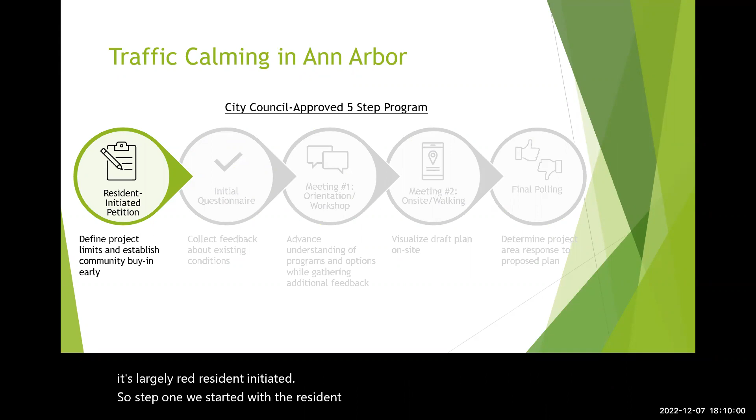So step 1, we started with the resident initiated petition. Any data used to reference this project will be from the petition received October 2019. I know some of you may be familiar with a petition that was submitted prior to 2017, but that petition did not qualify due to the structure of the traffic calming program at that time. That older petition data was not used for this project. So any reference to a petition moving forward is in reference to the one from October 2019.

So again, the numbers you see here are from the resident-initiated petition received October 2019. This summary shows that the program requirements for both area representation and minimum points were met.

Step 2 is the initial questionnaire. This is where you probably first saw the Wade Trim name and logo pop up with the City of Ann Arbor. This step is where we collected feedback about existing conditions through that initial questionnaire, which was mailed out to project area residents in October.

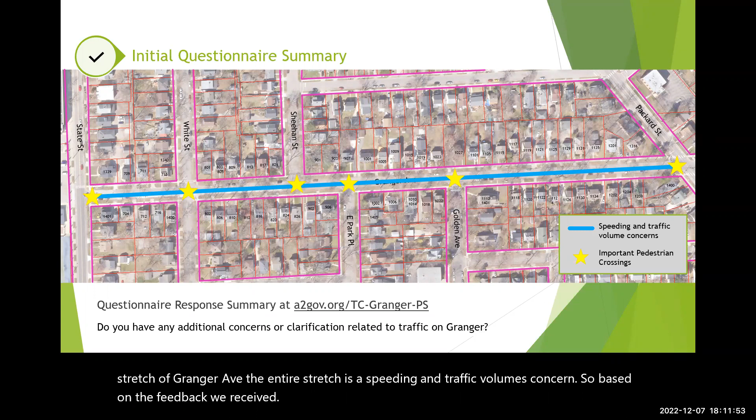Of those who completed and submitted the questionnaire, 88% were in support of continuing with the traffic calming program. This image shows that based on the questionnaire feedback, the entire stretch of Granger Avenue is a speeding and traffic volumes concern. It's not just Golden and Packard, or Park and Golden, it's the whole stretch. The stars mark where important pedestrian crossings are within the neighborhood.

The questionnaire response summary is available on the project website. If anyone has additional concerns or clarification related to existing conditions on Granger, we can take a moment if you want to raise your hand or use the Q&A.

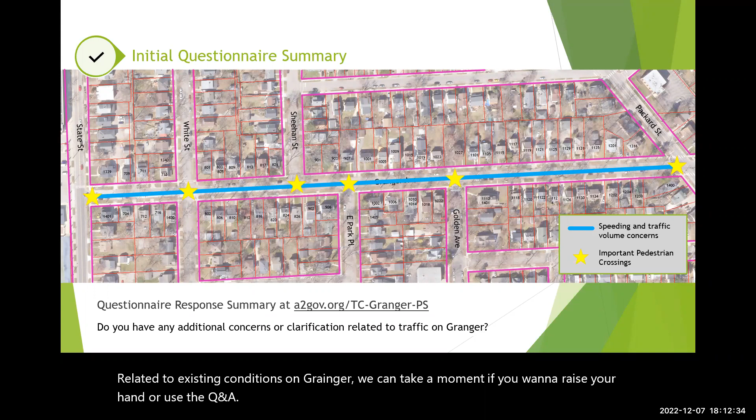There are no questions, Christy. Okay, thank you, Lori. So we'll move on then.

So that brings us to today. That's where we are this evening, Step 3, meeting number 1. This is where we'll advance our understanding of the options that we have and gather additional feedback based on the starter idea we will present.

Next, we'll launch another poll before we start discussing the device toolbox. This poll question reads: have you reviewed the traffic calming guidebook, specifically the device toolbox found on pages 9 through 12? Options are yes, I'm all set, yes but I would still appreciate a refresher, or no.

Looks like we have 7 out of 8 who have answered the poll. I'll give it just a few moments still before we close it. All right, we'll just close it.

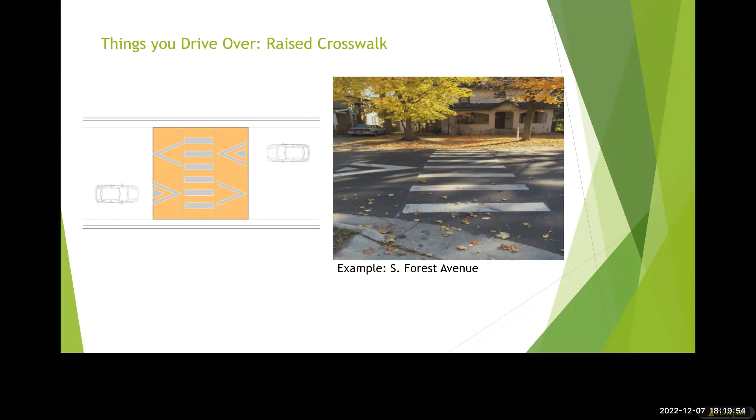Are there any questions regarding the devices that you drive over?

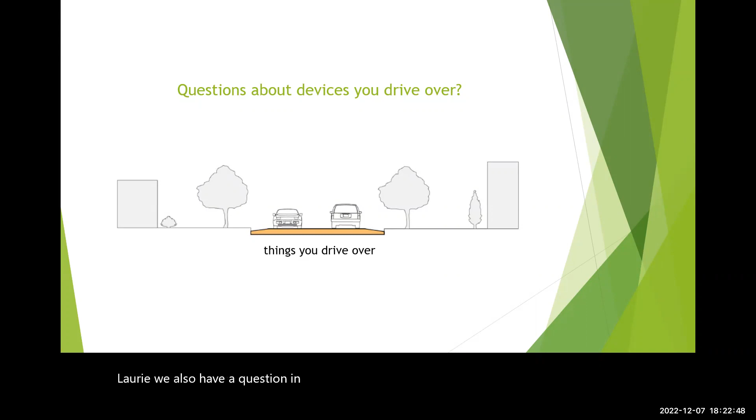Lori, we also have a question in the chat from Cherry: is the only real difference between the hump and the table that the table is flat in the middle?

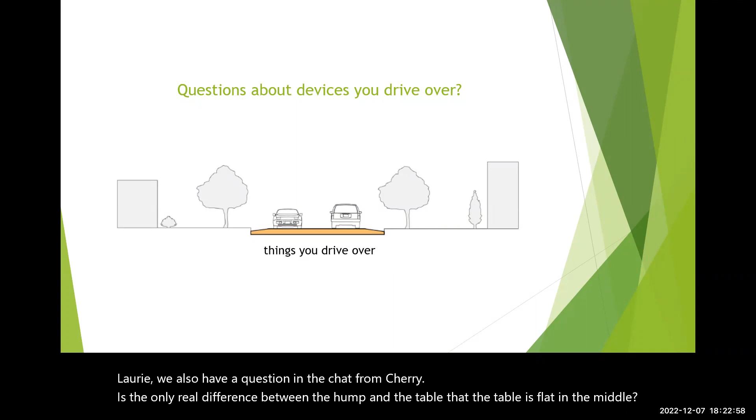So there are a few differences. There is the center flat platform in the speed table with the tapered sides. Usually the speed table is a little bit wider across from edge of roadway to edge of roadway, so typically they're around 22 feet wide. And then the speed hump was the other option. Those are a little bit narrower, typically around 12 feet wide. They're also parabolic in shape, and then they extend the full width of the street except for the gutter. So as far as design and the physical aspect, the biggest difference is that flattened center. There are some other minor differences, but the main difference between the two is that flat area in the middle.

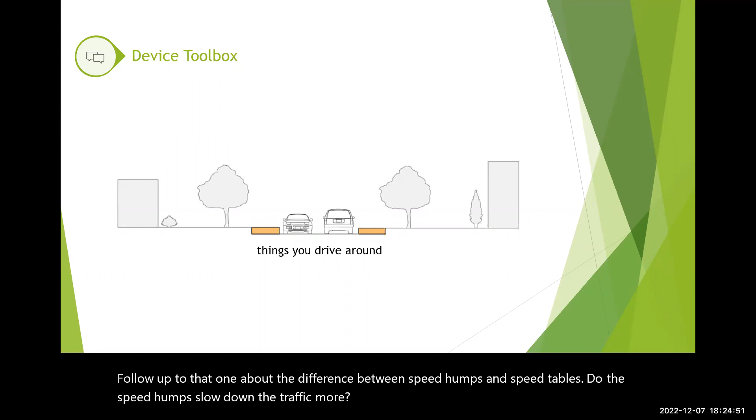So the speed hump was an average of 20 to 25% reduction in vehicle speeds. And then the speed table, let me see.

We did not have that listed. I will find out the reduction in speeds for those, and we can get back to you. I'll come back to this question. I'll look it up.

Hey, Lori. If you don't mind, I'll add a little more context to that. Can everyone hear me okay? This is Cyrus Naheedy from the city, and I'll just offer that the percentage, those statistics we offer

about speed reduction or traffic reduction, crash reduction, those are from larger studies done by the Institute of Transportation Engineers. So rather than focusing on a particular statistic and how much it slows down traffic, one device versus another, our experience at the city has been that while there are important differences between the devices and how much they can have an individual impact on vehicle behavior, generally a project is best viewed as how overall, like all devices on a project area, like in this case Granger, how all the devices together slow down traffic is probably more indicative of how it's performing.

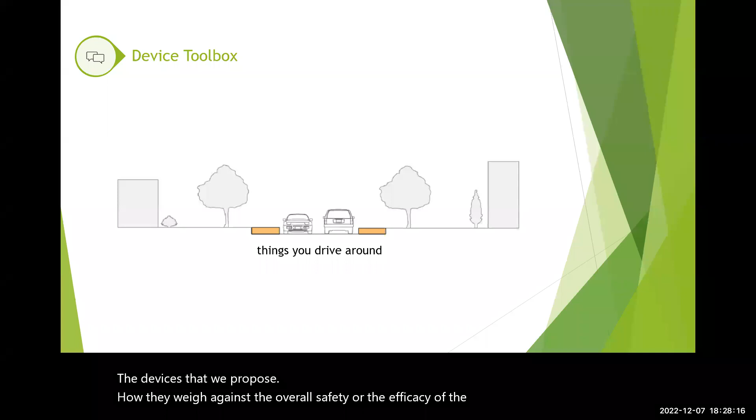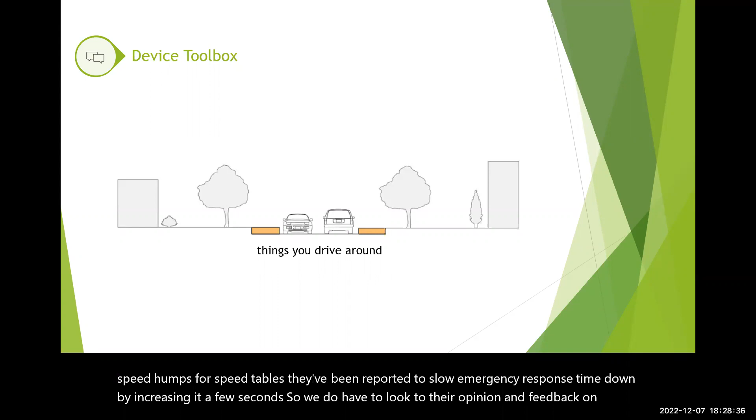So speed humps or speed tables have been reported to slow emergency response time down by a few seconds. So we do have to look to their opinion and feedback on whether that would weigh against the benefit of a speed hump or any of the devices, really.

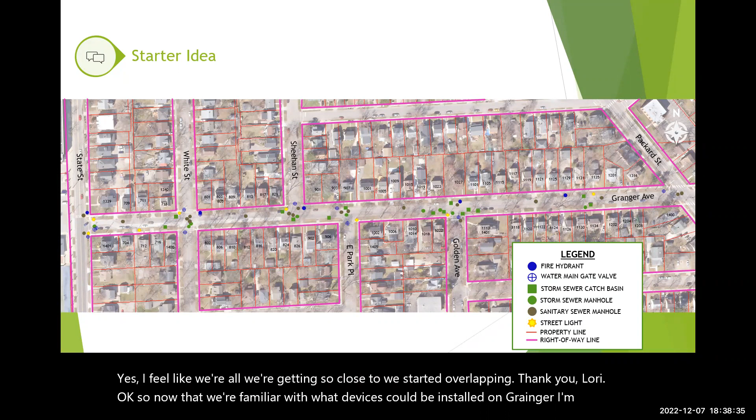Okay, so now that we're familiar with what devices could be installed on Granger, I'm going to present the starter idea. This image is showing the project area with existing utilities, property lines, and Ann Arbor right-of-way. This is what's there now. And these are the starter idea devices. We are proposing 4 traffic calming devices along Granger Avenue. So let us zoom in on each one for a better view.

Device number 1, we're proposing a residential traffic circle at the White Street intersection. This is one of the devices you drive around. Going back to the slide from our toolbox, it doesn't change the existing traffic control or flow of traffic. This is not a roundabout. You don't have to go all the way around just to make a left turn.

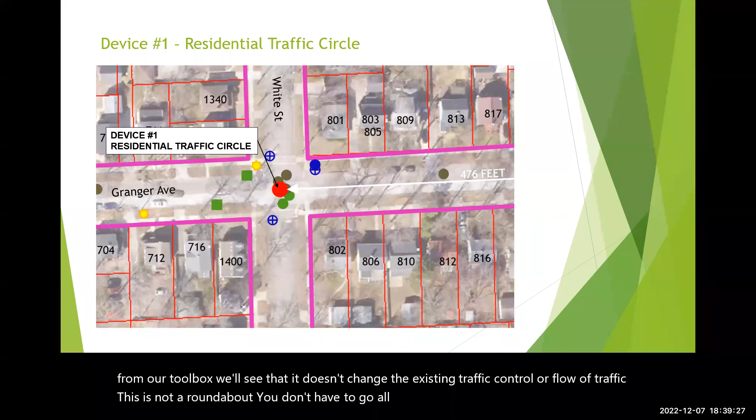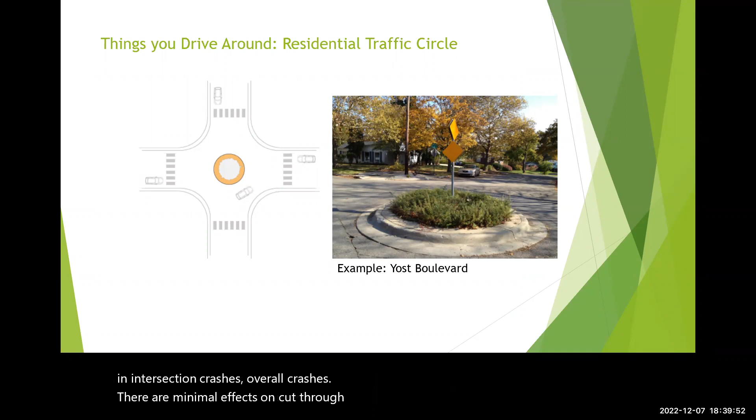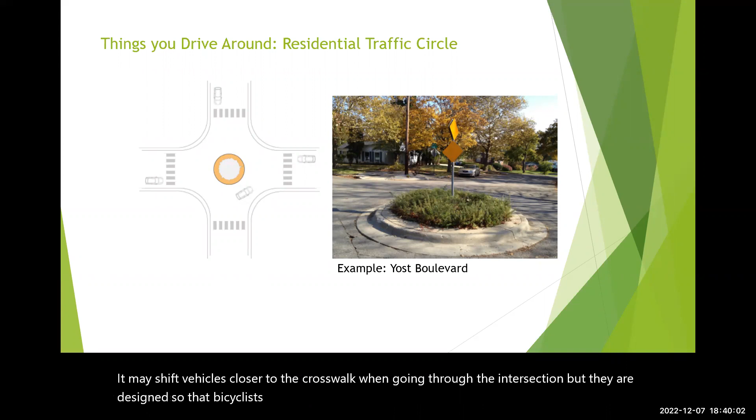Here's the slide from the toolbox. Remember that the residential traffic circle has reduction in mid-block speed, reduction in intersection crashes, and overall crashes. There are minimal effects on cut-through traffic. Left turns might be difficult for larger vehicles. It may shift vehicles closer to the crosswalk when going through the intersection, but they are designed so that bicyclists can navigate with traffic around the circle.

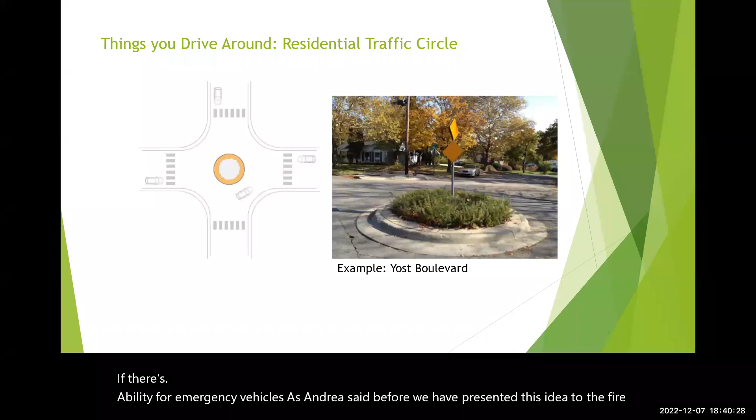As far as any questions of if there's enough room, if there's ability for emergency vehicles, as Andrea said before, we have presented this idea to the fire department. They've given us response that they do feel comfortable. So if this is something that you as residents feel would be useful to you or would be livable with, we would move further ahead with the design portion in terms of how big, how flat, all of that.

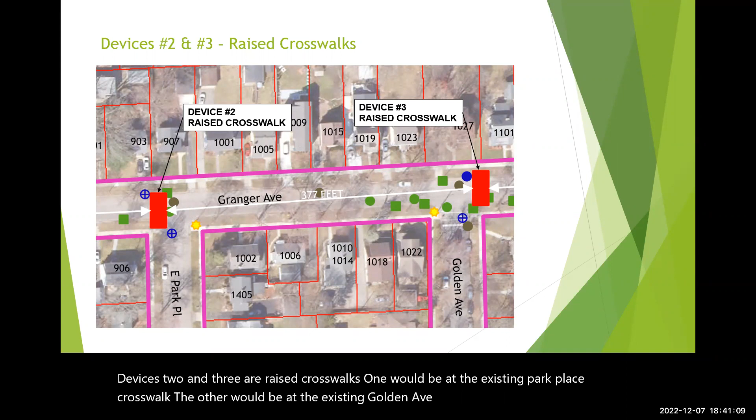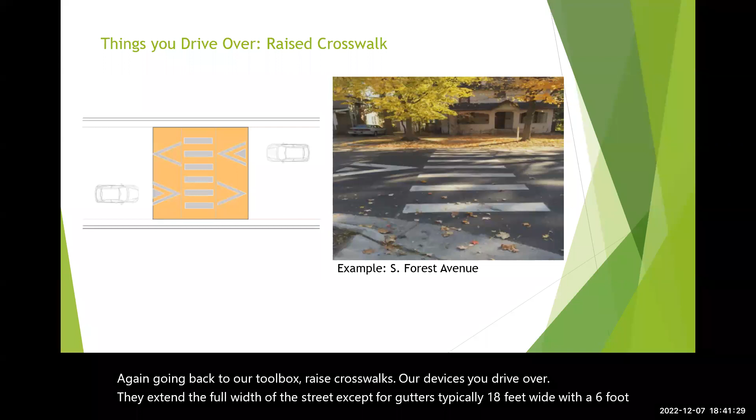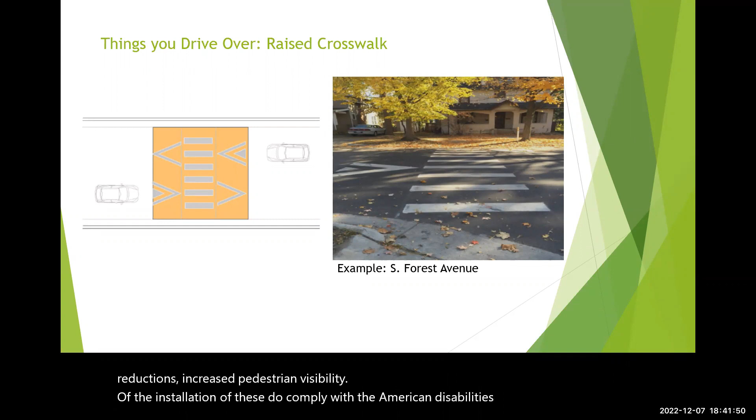Devices 2 and 3 are raised crosswalks. One would be at the existing Park Place crosswalk. The other would be at the existing Golden Avenue crosswalk. Going back to our toolbox, raised crosswalks are devices you drive over. They extend the full width of the street except for gutters, typically 18 feet wide, with a 6-foot wide center platform, and crosswalk striping. Usually what we see with raised crosswalks are speed reductions, volume reductions, crash reductions, increased pedestrian visibility. The installation of these do comply with the American Disabilities Act. So that is what we're proposing at these 2 crossings here.

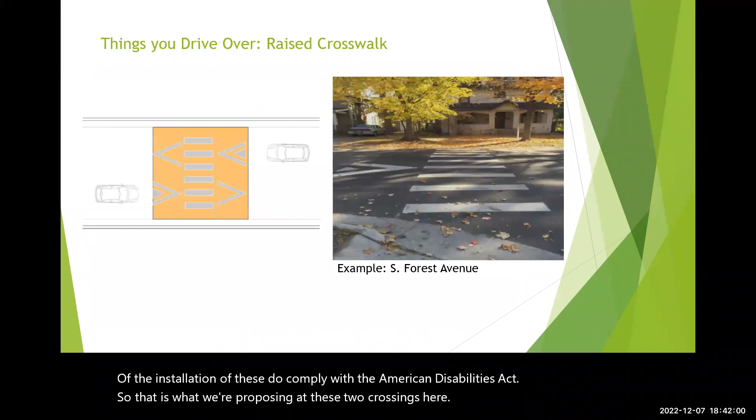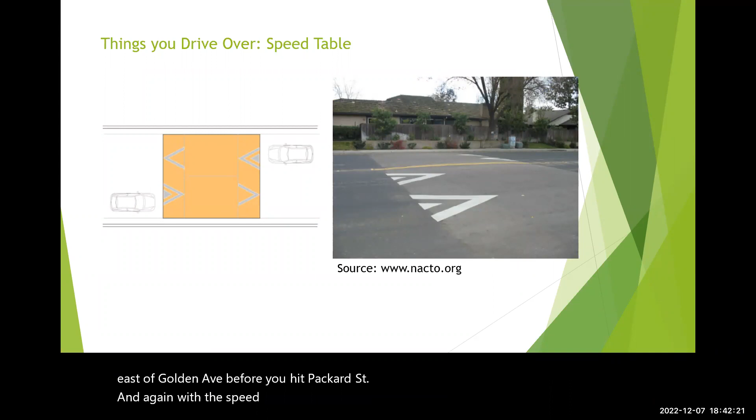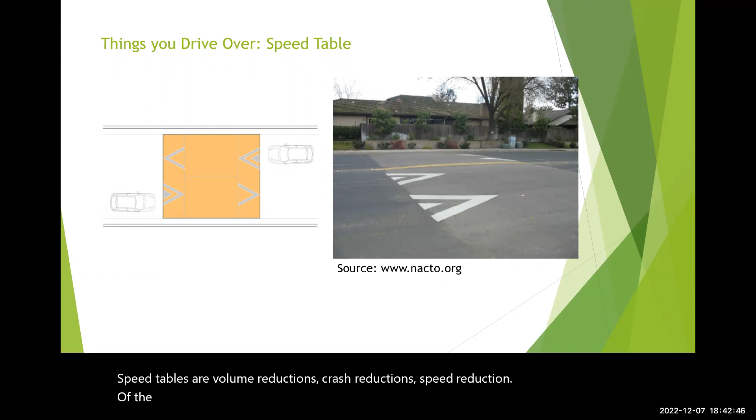Device number 4, we're proposing a speed table. This would be located roughly 375 feet east of Golden Avenue before you hit Packard Street. The speed table is typically 22 feet wide, going full width of the street except for the gutter, with a 10-foot wide center platform. What you usually see with speed tables are volume reductions, crash reductions, speed reduction. The height is designed for bicycle safety. There are no issues with permission to park vehicles on speed tables or placing trash cans on speed tables.

And so now we'll discuss. This was a lot of information we just covered, but I'll put the starter idea as a whole back on the screen. We'll spend the next chunk of time devoted to feedback and to giving everyone opportunities to speak. And I know I do have raised hands.

Christy, can I address one quick question about, has U of M been brought into this discussion? I saw it in the chat. U of M is not typically brought in to discuss. The AAATA is. We actually have someone here right now from the AAATA to review our plans and tell us if they have any issues. But we do take into consideration when drafting these plans, turn radiuses, the width of the streets, many factors that would impact any large vehicles or buses. So that has to do with fire rigs, buses, garbage trucks, public works vehicles, anything like that. So I just wanted to let you all know, because I saw a question about that, that U of M was not directly brought into this discussion. They aren't typically, but we are happy to give them the preliminary plan, which would be the one after this. They'll cover that more later, if that is something that needs to be done.

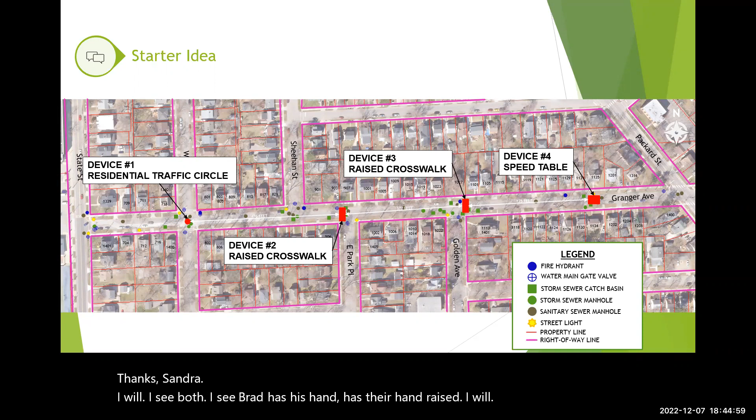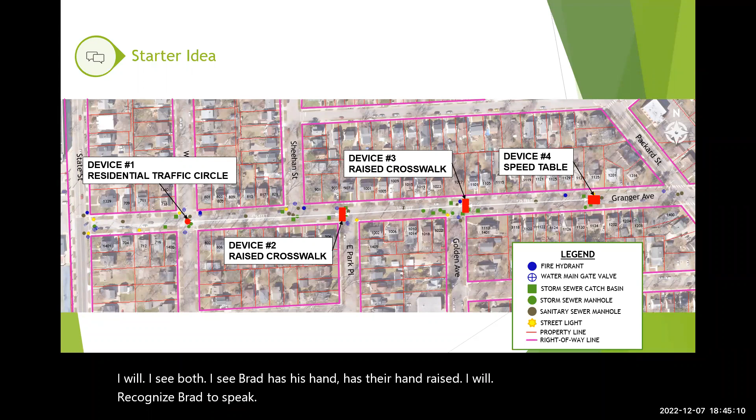Yes, good evening, Brad Batty. And I think we could effect the traffic circle proposal immediately. All it would take is a few trash cans. In fact, I've contemplated doing that on occasion.

Thank you, Brad. If this is something that does have support, we can move forward with additional designing of this device.

I think I'm more enthusiastic about speed humps or whatever, but I'd be willing to try the novel approach of the small circle if it helps.

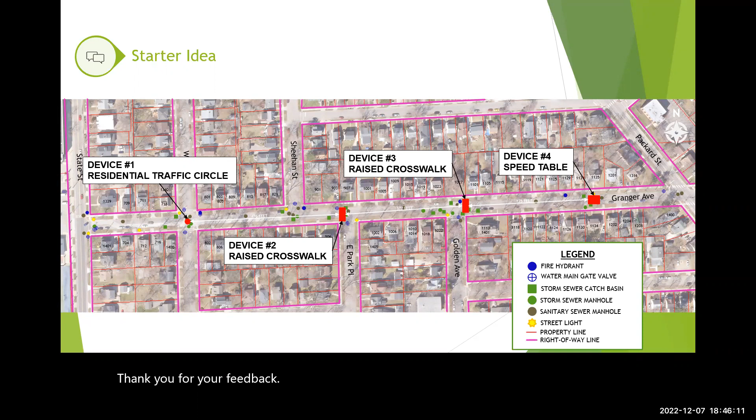Although I have seen 802 Granger have their porch demolished by a car missing the intersection somehow. Don't know how they did it, but they made a mess.

We do have a few questions in the chat box before we take other speakers. There was a question of how the location of the table was determined.

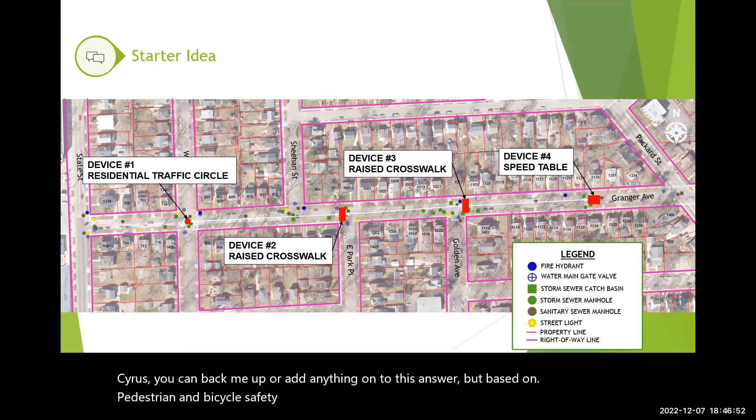Cyrus, you can back me up or add anything onto this answer, but based on pedestrian and bicycle safety resources, these traffic calming devices are usually only as effective as how they're implemented. So if you put devices too close together or too far apart, it's not really as effective as it could be.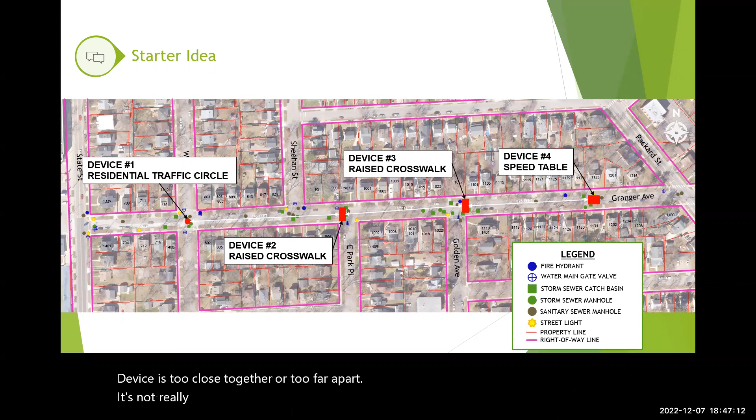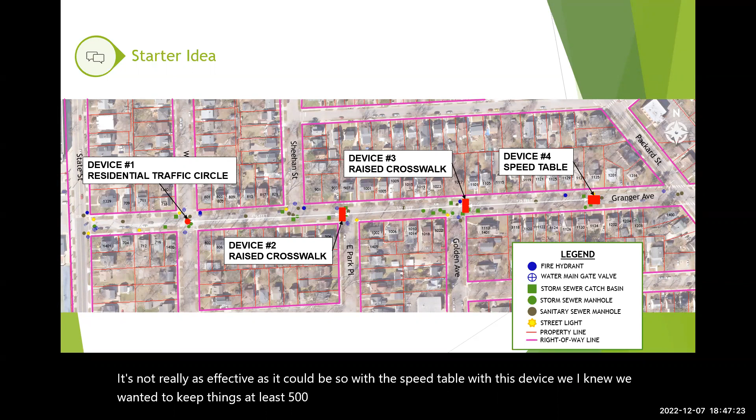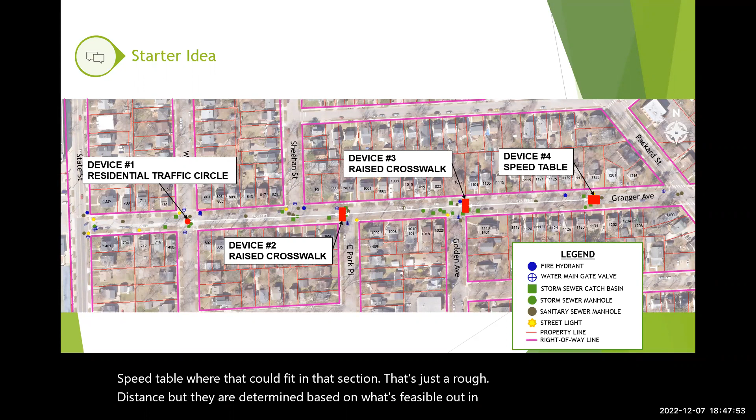So with this speed table device, I knew we wanted to keep things at least 500 feet apart, less than 500 feet apart, in order to maintain traffic calming throughout the entire section of Granger. So going down the neighborhood and taking a look at the typical dimensions of a speed table to see where that could fit in that section. That's just a rough distance, but they are determined based on what's feasible out in the field, in the project area, and based on those safety resources.

Yep, nothing major to add, just that the device's proximity to each other, or in device one's case, how close is it to the end of the corridor to State and Granger? Device 4, how close is it to Packard and Granger? Trying to keep them relatively close together, but not too close, I think is a big element of this starter idea. There's a number of crosswalks, so we, in theory, had those to use as starting points.

You can see there are 2 raised crosswalks here, but instead of just making every crosswalk or most crosswalks raised crosswalks and calling it a day, we wanted to introduce everyone to the idea of different devices. So a speed table in this case, because there's not a crosswalk there, and I don't think there's a significant need for a mid-block crossing there. We could always consider that based on everyone's feedback here, but if there's not a need to actually cross Granger between Packard and Golden, then a speed table would suffice.

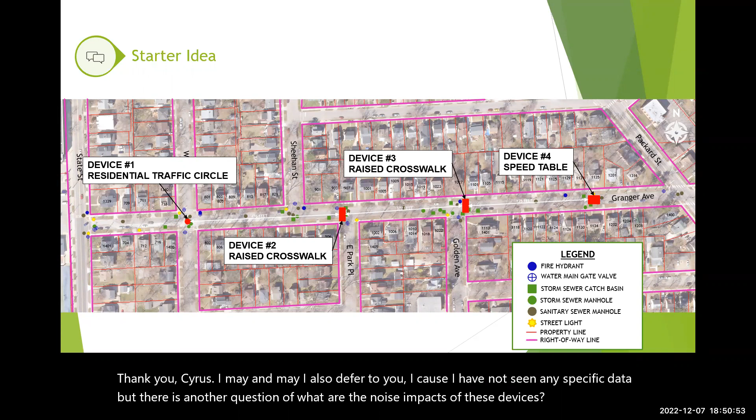That's a good question. I don't know that we have quantitative measured data on that. Andrea, you might be able to speak better to this than I can, because you've probably spoken with more traffic calming residents than I have. I can't recall this being a significant issue that we've heard back about.

No, you are correct, we have not heard any complaints. We have also tried to find research out there about increased noise from these devices installed anywhere we can find it, from FHWA, and Boulder, Colorado is another place we like to look for data because they implement a lot. But we have not been able to find anything out there saying that device installations increase noise.

We also do a 1-year follow-up survey asking residents for feedback about the devices installed, and we have never once at this point—and I've been with the program for about 8 years now—heard any noise issues at this time. So I can't point you to data that says one way or the other, but we have not heard anything at this time. That might not be a great answer, but that's the answer I have, and I'm sorry.

Yeah, I've worked on other projects outside of Ann Arbor, installation of speed humps, speed bumps, speed tables, and I haven't heard any complaints of noise either. They do help to slow down the traffic, and the noise is just not a huge issue. In the neighborhoods, they're typically much happier having the traffic be slowed down, and not really noticing the noise associated with any bumps.

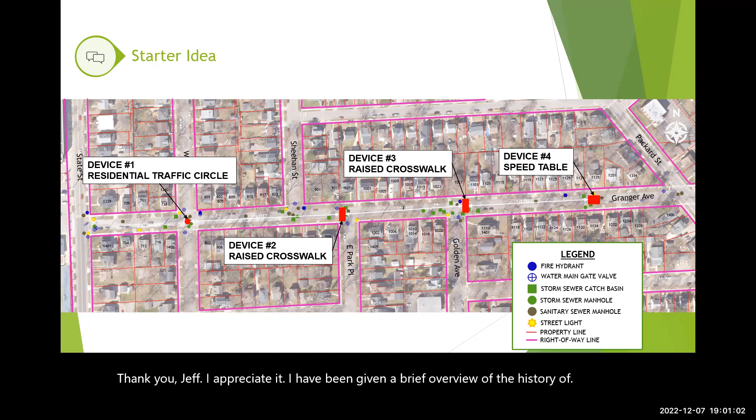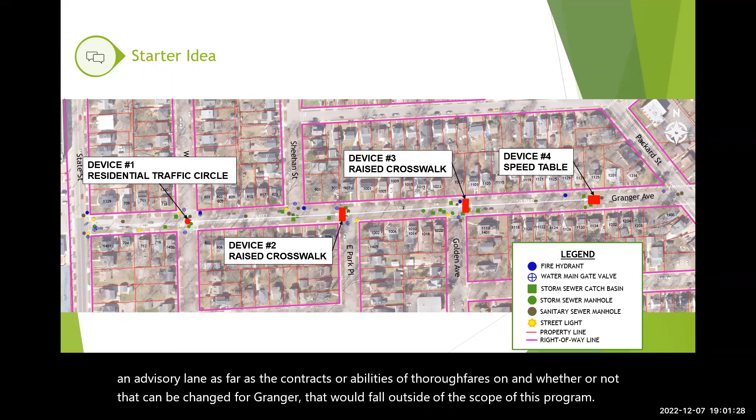Thank you, Jeff, I appreciate it. I have been given a brief overview of the history of changes that Granger has experienced, with that original petition and the conversion to an advisory lane. As far as the contracts or abilities of thoroughfares and whether or not that can be changed for Granger, that would fall outside the scope of this program. Unless Andrea wanted to add anything, I'm not aware of any procedure we could take action on within this program.

Christy, you are correct. Jeff, if I understand what you're saying, you're referring to Act 51 funds. Per Act 51, this street is deemed, if I remember correctly, a major, which meant the traffic calming program previously used Act 51 to determine when streets fell into the local traffic calming program based off of their classification. Granger was one we did realize, a little bit of history, so everyone else here knows what we're talking about.

Granger was one of the streets that led us down the road of thinking about other maps to utilize, like the National Functional Classification, the NFC. It's SEMCOG's map, which classifies Granger as a local. So we used that with our updated program in 2019 to allow other projects or streets into the program that wanted in for a while, but were classified off the Act 51 map as a major, and this is a local streets program.

I don't want to speak on behalf of the city in the sense that we would never ever remove anything from Act 51, but we receive more money when it's classified a different way. So I'm not saying this is off the table for discussion, I'm just saying, Christy, you're correct, it's outside the scope of this program. Jeff, if you want to send an email to trafficcalming@a2gov.org to discuss this further, we could have the transportation manager and whoever else part of that discussion if needed, and provide a better answer than what I just gave. Feel free to reach out to traffic calming and we can provide a better answer.

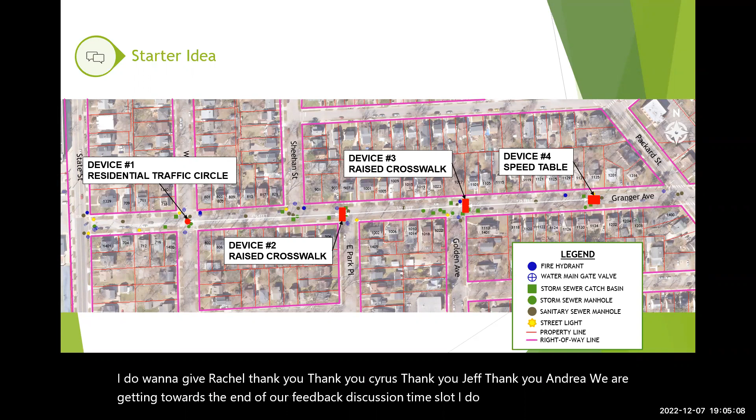I do want to give Rachel, thank you, Cyrus, thank you, Jeff, thank you, Andrea. We are getting towards the end of our feedback discussion time slot. I do want to give Rachel the opportunity to speak, and then I have a question from Tom that I'd like to answer afterwards. So I will go ahead and let Rachel, if you'd like to unmute yourself.

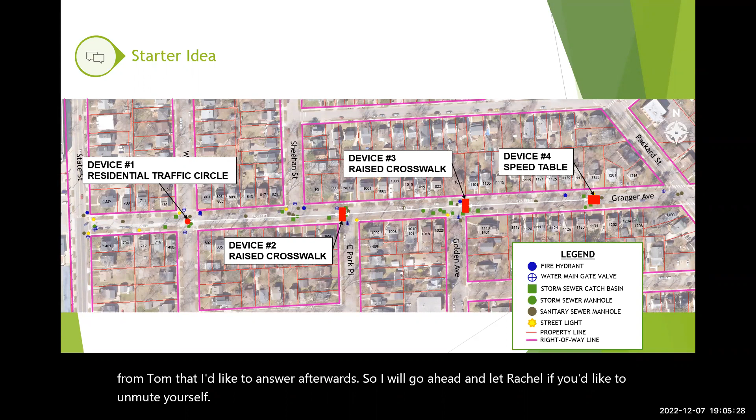Rachel posted in the chat asking if these traffic calming measures are likely to impact the current lines. As a cyclist, I'm a big fan of the current paint and lines on Granger. I think that has done a significant part to slow traffic, and I'd like to see them stay that way, even if there are additional traffic calming measures, which I really hope there will be. I'm just trying to figure out how the two affect each other, or if they do.

Oh yes, I did answer that. I don't know if it was published, but I did add a typed answer to that question.

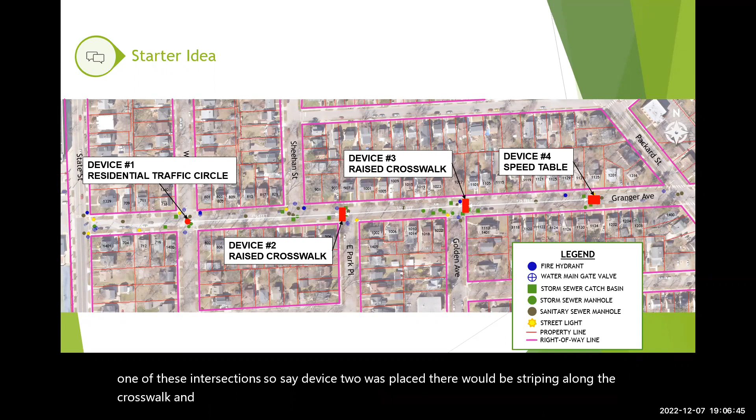We do not disturb any existing pavement markings. We don't take them away, and we don't add more if they're not related to a device. So if there was, say, a raised crosswalk placed at one of these intersections, if device 2 was placed, there would be striping along the crosswalk. And then, if I'm correct, those bike lane lines would be restriped as well.

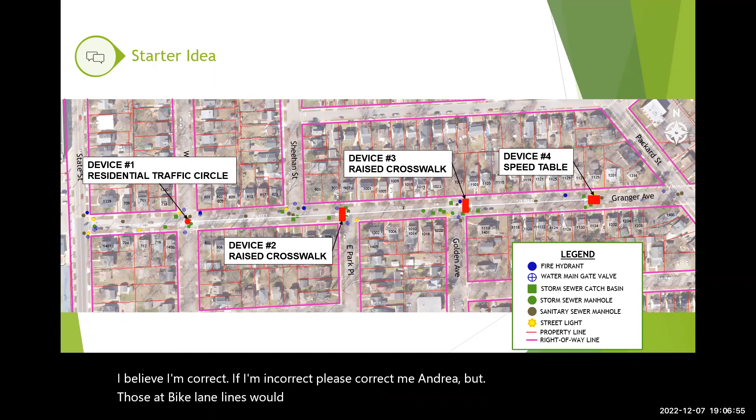So you are correct, Christy. This is a retrofit program, so the existing road should stay — and I say should because sometimes we do have to make accommodations. This is a starter idea, a preliminary plan. We've done way more vetting, just gonna say that. But we don't take things away unless that's very clearly stated.

So the existing road, it's a retrofit program. We don't change curb lines, anything like that, with the exception of sometimes bump outs, but you guys already have bump outs, which is why they're not proposed here. They have as many bump outs as we can give you. So yes, everything should stay the way it is. These are just additional devices, and unless pavement markings conflict with what's out there, we don't like to take things away.

And Cyrus, if I remember correctly, our new Ann Arbor Moving Together plan identifies this street as one of the ones that — correct me if I'm wrong — there's something there too, where we wouldn't want to take anything away that's existing. You're right. As Christy and Andrea said, we wouldn't modify anything.

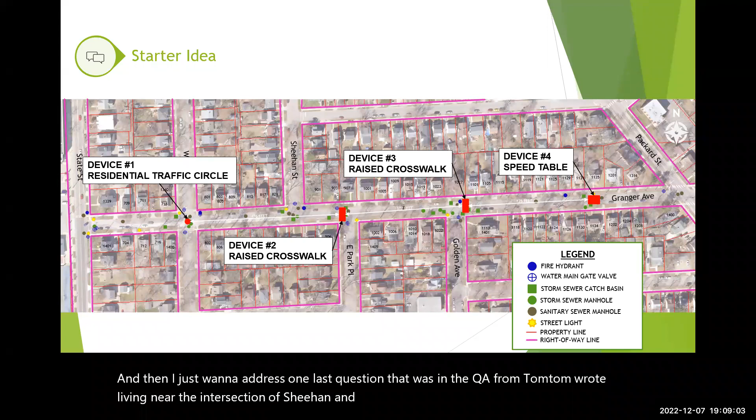I just want to address one last question that was in the Q&A from Tom. Tom wrote: living near the intersection of Sheehan and Granger, we regularly observe several near misses involving vehicles pulling out onto Granger. This appears to have started only since the parking spots were placed at this intersection. Is there anything that could be done to make this intersection safer?

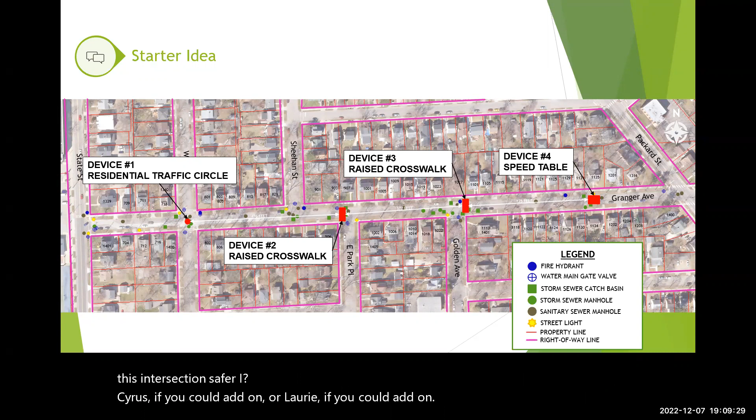Cyrus, if you could add on, or Lori, if you could add on — I know that the proposed traffic calming device, device number 2 at Park Place, would, because of Sheehan's closeness, have an effect on Sheehan as well. But Lori, if there's a more direct solution, if that's what you were thinking.

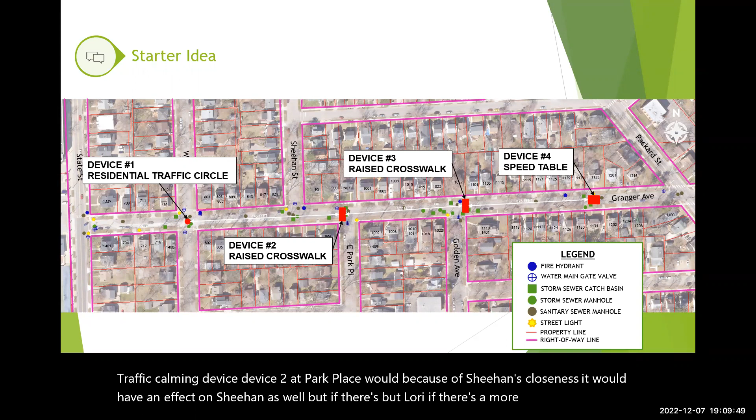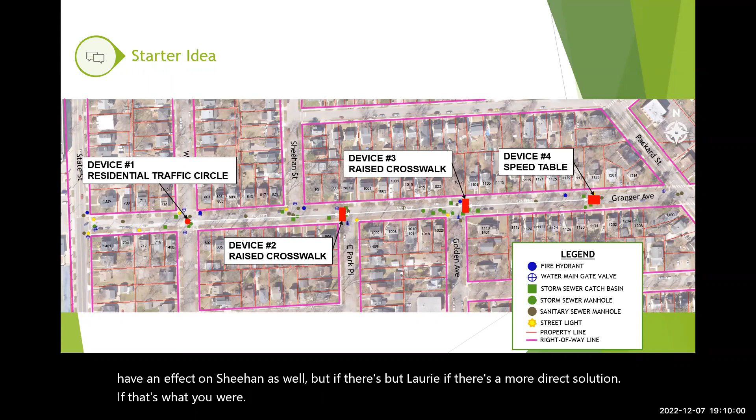I thought I saw on the chat a little note that said Andrea would like to answer the question, but then that disappeared, so I wasn't sure if Andrea had a comment as well. No, I was marking it as answered live. You're good, keep walking, okay, or keep going.

So the issue being discussed in this question is related to parked vehicles, whether legally or illegally parked, on the side of the street — that's a sight distance issue and not really able to be addressed as part of the traffic calming program. So it wouldn't be the type of issue we could accommodate in this study, but it could be looked at as part of another effort. I think Andrea mentioned you could email a2gov and discuss it as part of another potential study they could look into as well.

Yes, thank you, Lori. Cyrus, were you going to add anything? No, I realized I was just going to offer a restated version of what Lori said, so I decided to stop.

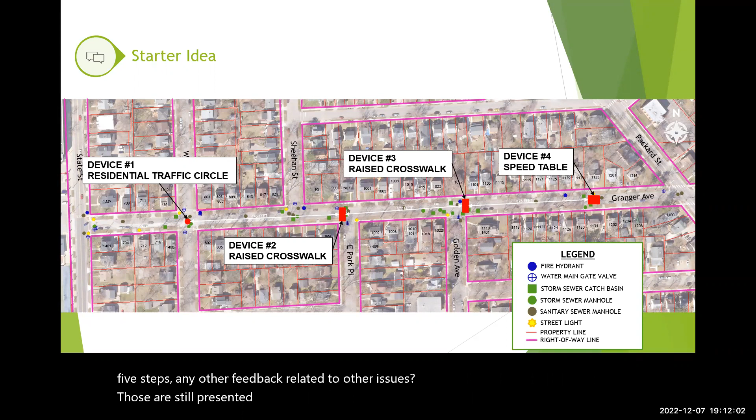Tom, I don't want you or anyone else to think that if this program cannot address your specific concerns, they're just thrown out. We gather all of this feedback, and once this program is completed through the 5 steps, any other feedback related to other issues is still presented to the city engineering department to use in future work.

Thanks, Christy. I was going to add that if there's a determination of a change to be made that's not within the traffic calming program, we can make it independently. If this project isn't supported in the end and no traffic calming is installed, but we determine there's a need to change something else based on feedback we've heard through this project, we would still make those changes.

Please share that feedback and we'll take a look at it independently. If there's a need to change anything, we'll either change it independently of the traffic calming program, or we may try to coordinate the timing of a change so it's done with the traffic calming program, but those are independent of whatever actually happens with this project through the program.

I was going to suggest that Cherry has some comments about the Granger and White intersection and device number 1, the starter idea of the traffic circle. We have polls further ahead where you can vote on those types of options and ideas, so maybe we can move forward into that section. That would help us understand if that option is desired or not, or if another option is preferred.

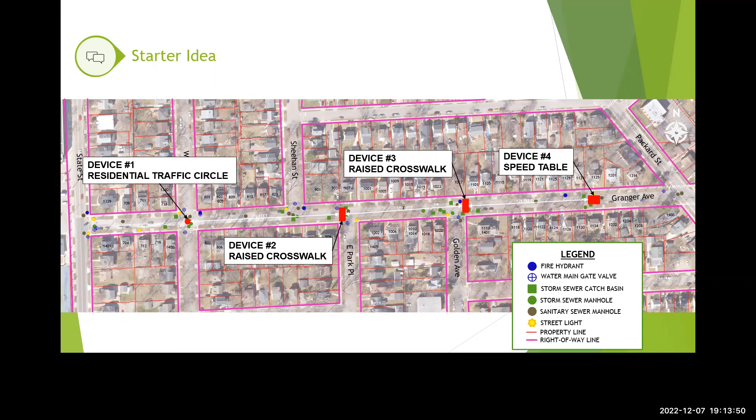Yes, thank you, Chris. I think we've had good discussion on this starter idea. We're going to move on to polling. Again, I'll pull up each of these devices and we'll launch a poll on whether or not you support them.

So for device number 1, we'll launch a poll here. The question reads: do you support device number 1, residential traffic circle at White Street? There are 4 options to vote on: yes, I support this device and live in the project area; yes, I support this device but do not live in the project area; no, I do not support this device and live in the project area; or no, I do not support this device and do not live in the project area.

The last time I checked, everyone said they did live in the project area, so I shouldn't see otherwise.

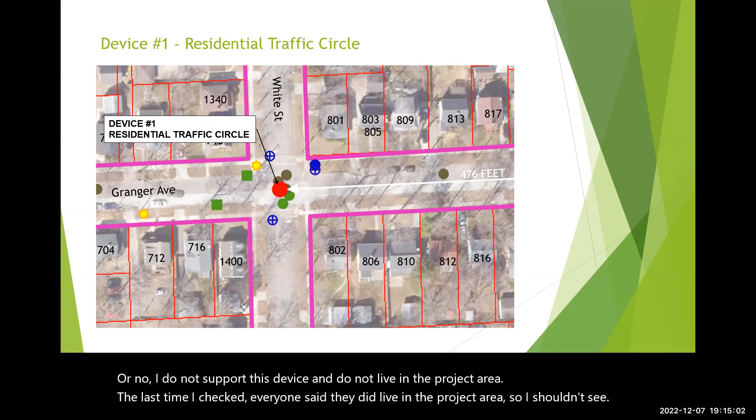Also, Christy, because we heard some feedback about possibly wanting a raised intersection here, I took the initiative and added a part 2 to this device, so you can like both the raised circle or residential traffic circle and the raised intersection. We want to see your preference so we can go back, reevaluate, and make sure the preliminary plan addresses all your concerns. So there's a second question: do you also support a raised intersection at White Street? It's one or the other, but you can still like both.

The options are: yes, I support this device and live in the petition project area; yes, I support this device and do not live in the petition project area; no, I do not support this device and live in the petition project area; no, I do not support this device and do not live in the petition project area.

Christy, I apologize for jumping in, but I thought I'd add that for you. No, I appreciate it, thank you. I was about to finish that up - I was like, wait, there's another question.

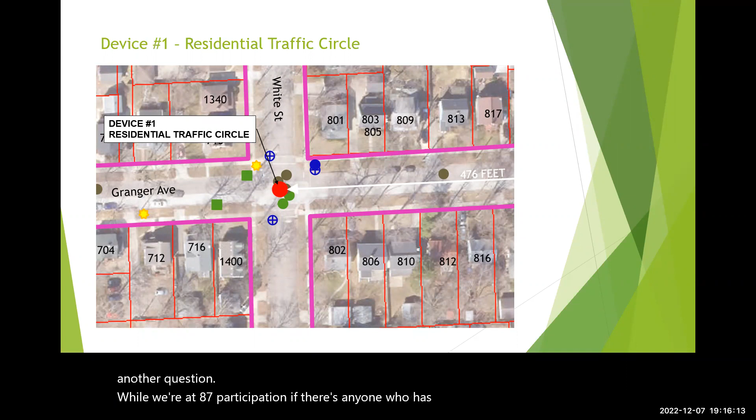We're at 87% participation. If there's anyone who has not finished polling and would like to, please do so now. I think we can close the poll and share the results.

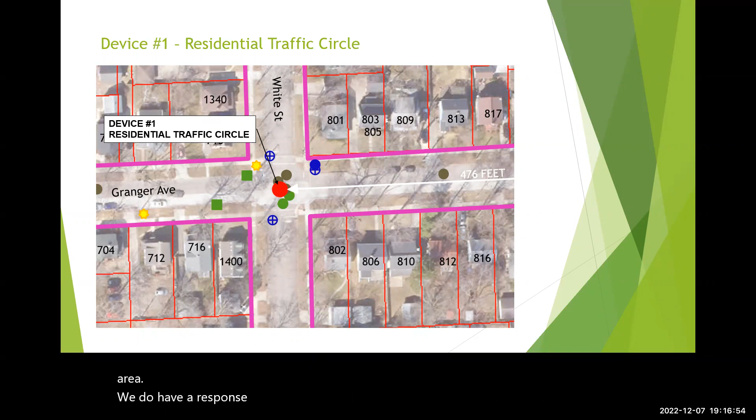So it looks like here with device 1, 86% of respondents have said that they do support device number 1, the residential traffic circle at White Street, and live in the project area. We do have one response of non-support. We also have, but the good news is, 100% support on a raised intersection instead of a traffic circle. So that's great to have 100%.

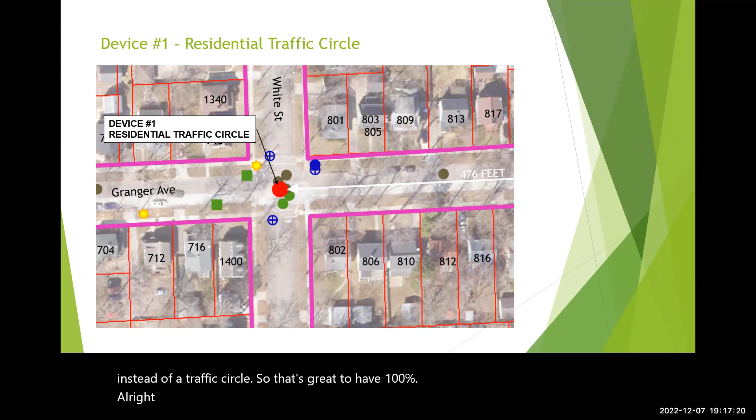All right, so let's move on to device number 2, raised crosswalk. We'll have a poll on device number 2 only. I know devices 2 and 3 are shown in this picture, but this poll question that will pop up is only for device 2. Poll question reads: do you support device number 2, raised crosswalk at East Park Place?

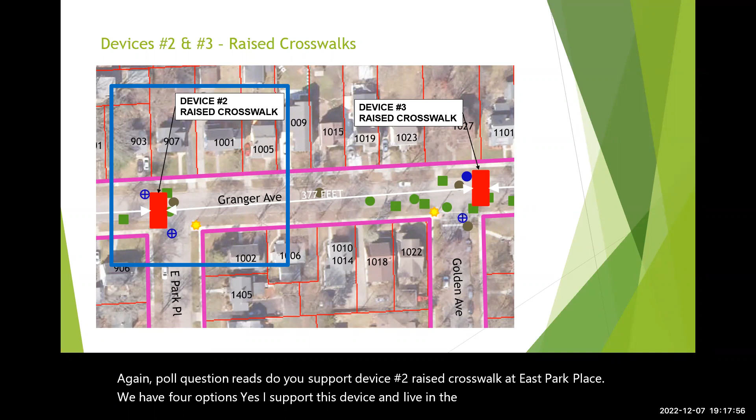We have 4 options. Yes, I support this device and live in the area. Yes, I support this device but do not live in the area. No, I don't support this device and live in the area. No, I don't support this device and do not live in the area.

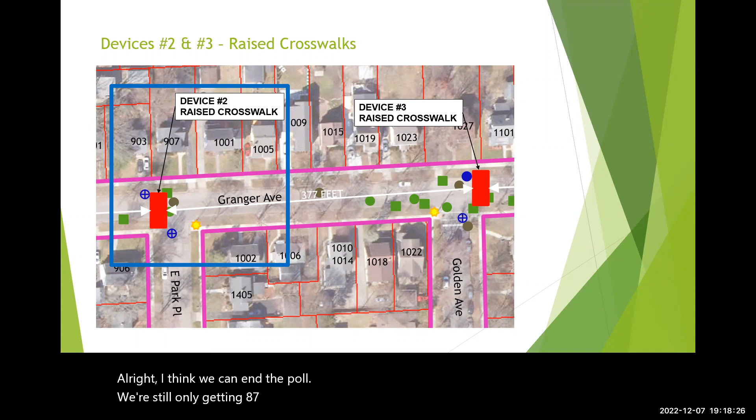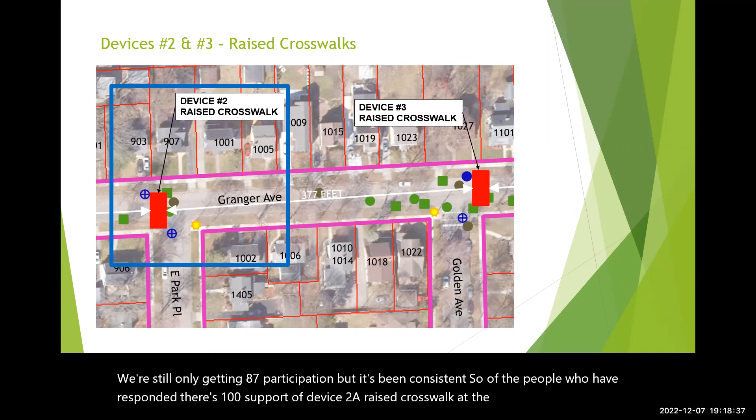All right, I think we can end the poll. We're still only getting 87% participation, but it's been consistent. So of the people who have responded, there's 100% support of device number 2, a raised crosswalk at the intersection of Granger and Park Place. I love it.

So we'll do the same thing, same question, but for device number 3, there's a raised crosswalk here at Golden Avenue. Poll question is, do you support device number 3?

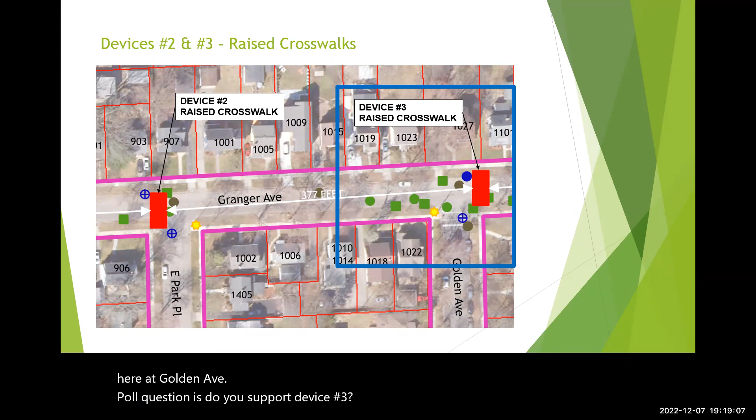And we can go ahead and close the poll. We have all of our participants answered, sharing the result. There is 100% support for this device.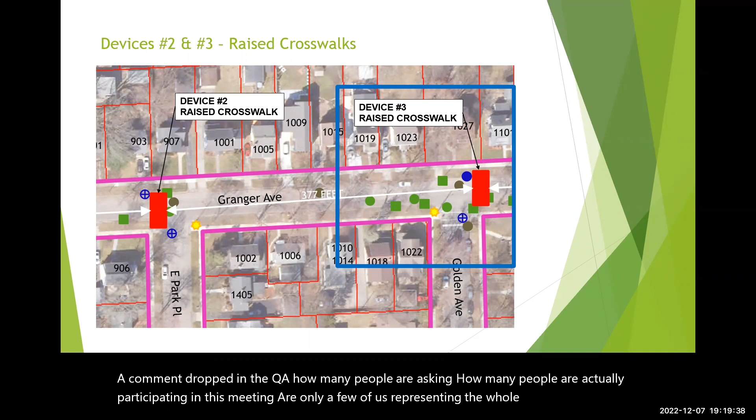I do want to comment, there was a comment dropped in the Q&A asking how many people are actually participating in this meeting. Are only a few of us representing the whole neighborhood? Are those who are not at this meeting going to be able to have input? I will say that the notice of this meeting was provided to all residents within the project area. It is recorded and will be put on the project website for anyone who might not have been able to attend.

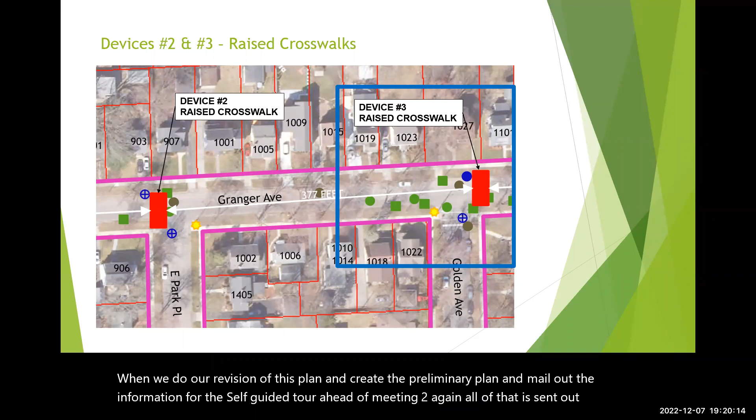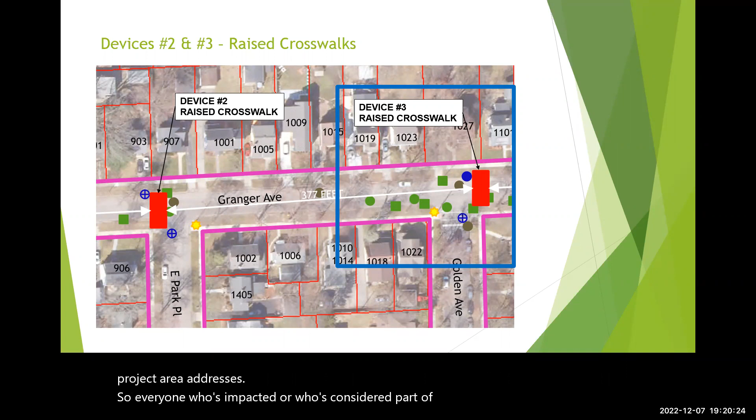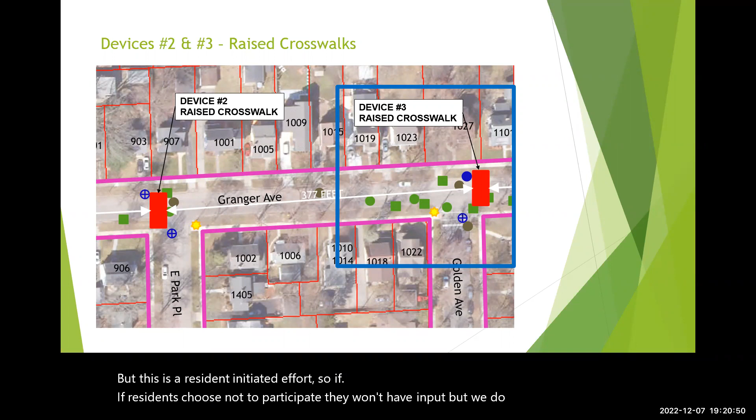When we do our revision of this plan and create the preliminary plan and mail out the information for the self-guided tour ahead of meeting number 2, all of that is sent out to the project area addresses. So everyone who's impacted or considered part of this project area is given the information for these meetings, these designs, and they have the opportunity to participate in the questionnaire and the final polling. But this is a resident initiated effort, so if residents choose not to participate, they won't have input. But we do give all of the residents multiple opportunities to participate in this project and in providing their feedback.

But we'll go ahead and move on to the poll question for device number 4. So here was device number 4, a speed table. The poll question should pop up. It'll read, do you support device number 4, speed table east of Golden Avenue before Packard Street?

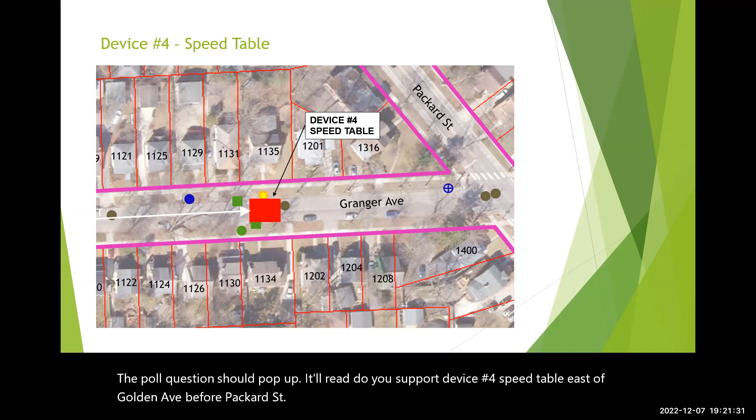Wow, this is the one I thought would get the most pushback on. Can go ahead and close the poll. Everyone got their answers in, and we have 100% support. I love it. Those are the results.

Oh, popped up, closed. So that was it. Those were the 4 devices that we proposed, and we polled on an alternate for device number 1. I really appreciate you all sharing your feedback and participating in this discussion, and this is really good feedback for us to move on as we continue the design.

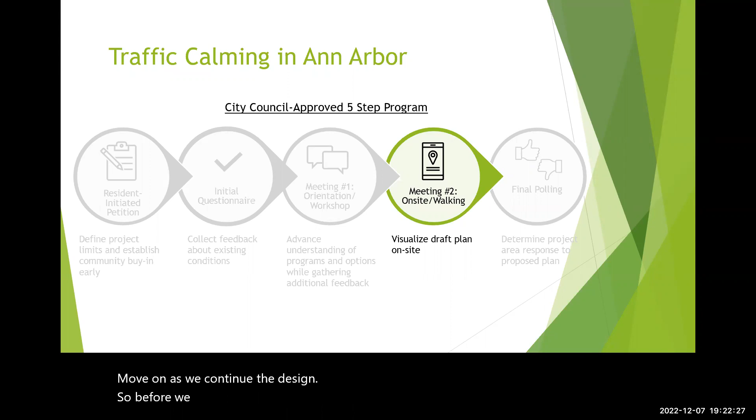So before we wrap up this meeting, I'll explain the last 2 steps of the program and then give everyone a timeline. The next step is meeting number 2. Meeting 2 will consist of 2 parts: there's a self-guided tour and a Zoom meeting. That Zoom meeting is scheduled for February 8th.

For the self-guided tour, like I just commented, you will receive a mailing packet sometime in January. It'll contain the preliminary plan, which is this starter idea that we've given you today, but accounting all of the feedback and the polling that we've discussed. It'll have device images and device descriptions, which can be utilized to complete the self-guided tour prior to that February Zoom meeting. Device locations will be marked in spray paint on the pavement, and we'll display the device image and a description on a temporary sign near each of those locations.

And you can also use Google Street View to conduct the self-guided tour. Everything you'll need will be in that packet, and you can either walk through Granger or you can do it online, because I know at that point the weather might be kind of yucky outside.

Again, the meeting number 2 Zoom portion is scheduled for Wednesday, February 8th at 6 p.m. During the meeting, we'll present the preliminary plan, answer questions, and poll the audience on each of the devices. It'll be very similar to what we just did with the starter idea, but we won't have to go through the toolbox or all of this introductory information.

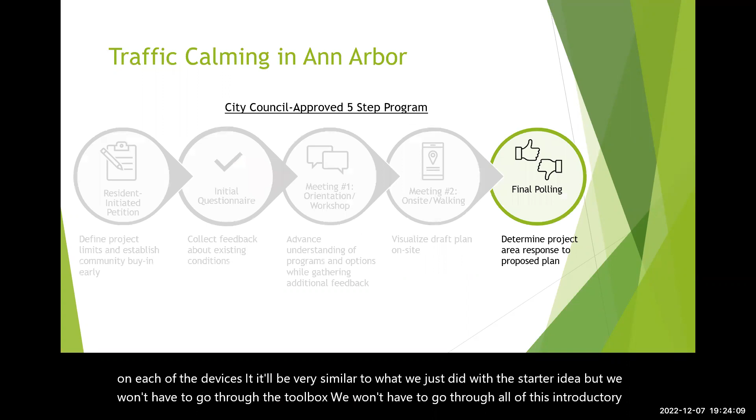After that, our last step is final polling. All residents and property owners will be mailed the final polling package, which contains a description letter, the final plan, and final poll. Just like the initial questionnaire, you'll have the option of submitting your poll by mail or completing it online. To continue moving forward in the traffic calming process, greater than 50% response support is required.

So if we only get 2 people to respond to complete the poll, one says support, one says do not support, the plan cannot move forward. If we get 3 people to fill out the poll, 2 say yes, 1 says no, then the plan can move forward. It has to be greater than 50% of the responses in support.

If this criterion is met, our team will request support from the Transportation Commission at their May meeting, and request City Council's approval for construction at their June meeting. If this project receives approval from City Council, a construction date will be determined.

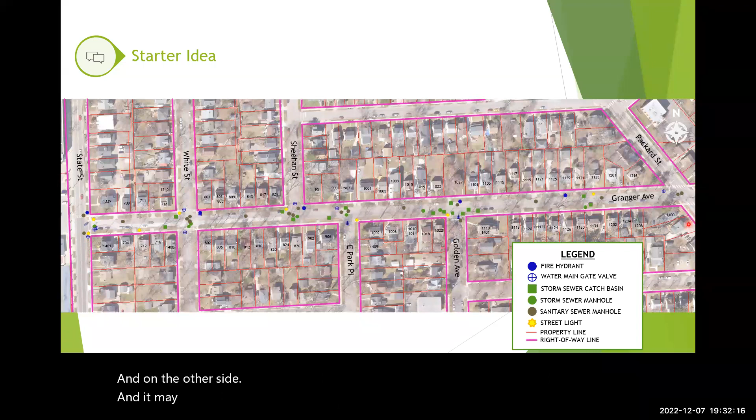Thank you, and I'll go back to this last slide again, but I did want to show you, well, any of these. Where's my little laser? I believe I did have another graphic where all of the ones in the project area were highlighted, but this one does not have it. So I believe there are a couple addresses here at the corner, and then all of these addresses that are along Granger here and on the other side. And it may include these corner ones as well, at the corner of Packard and Granger.

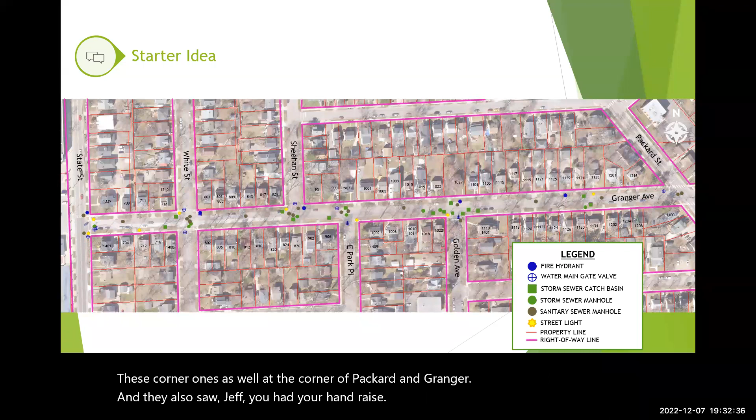And then I also saw, Jeff, you had your hand raised. Yes, I'll make it really quick. I know we're pushed for time, but I wanted to thank everyone for participating and helping out. And my only other question is just, maybe I got confused at some point, but what about if a speed table or a speed hump...

...in combination with other devices, whether they be drive over or drive around, if that is something that would help to slow down the traffic, maybe 10 to 15 percentage points, depending on how it's laid out. I know there could possibly be a guesstimate or an analysis of maybe 2 or 3 different possibilities, perhaps. I know you're taking in a lot of different information and spacing and things like that, and how different devices, drive overs or drive arounds, are spaced and all that. But at our next meeting, is there a possibility for different plans that can be voted on, where perhaps with some of the verbal comments that we've made, some of those other devices like a speed hump or a speed table could at least be talked about for possible implementation, if I'm making myself clear. So I'm getting tired, and I thank you.